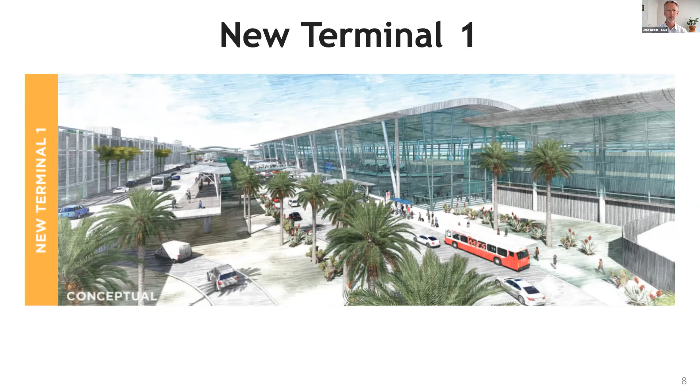So next slide. And go one more, please, Darby. The framework that helps guide our decisions internally, separate from those certifications I just mentioned, is a sustainability management program at the Airport Authority that comprises 7 unique plans: Clean Transportation Plan, Carbon Neutrality Plan, Climate Resilience Plan, Zero Waste Plan, Biodiversity Plan, a Water Stewardship Plan, and a Strategic Energy Plan. All of these plans are board accepted documents, and they really help drive the process of stakeholder engagement at the authority.

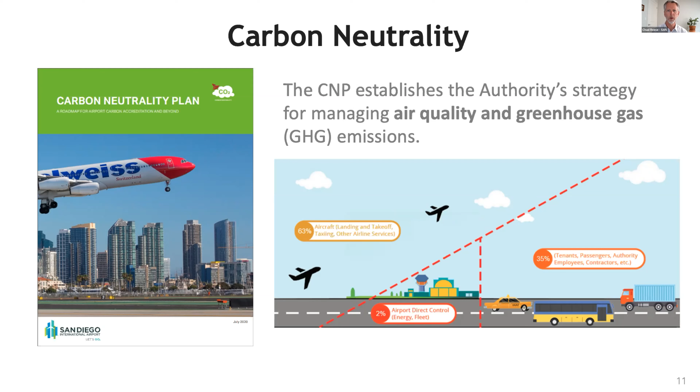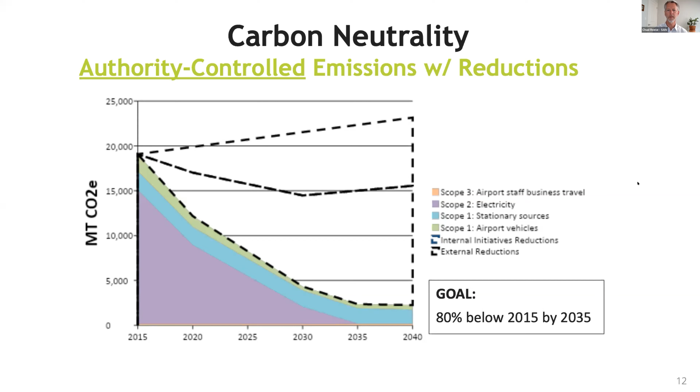But I'm going to dwell for a moment on authority controlled emissions on the next slide. And go one more, please. So what this demonstrates is a graph of carbon reductions through 2040, described by the different scopes: scope 1, 2, and scope 3. The dotted lines represent internal and external reductions. So we are able to leverage the state of California long-term goals, which gets us quite a bit of the way to our goals. But then we also work on emissions reductions for grid delivered electricity, so assets, buildings, and things like that. We do have a long-term goal of 80% below 2015 levels by 2035. Next slide, please.

So if you look at authority controlled emissions, we're really talking about on-site renewable electricity and batteries, grid delivered renewables that I mentioned, either Eco-Choice or the new San Diego Community Power, which the authority is scheduled to be opted into in the June timeline. High performance facilities really speaks to that slide I mentioned earlier with LEED and others. We focus on alternative fuel equipment, and we have a fleet of 100% alternative fuel vehicles at the airport.

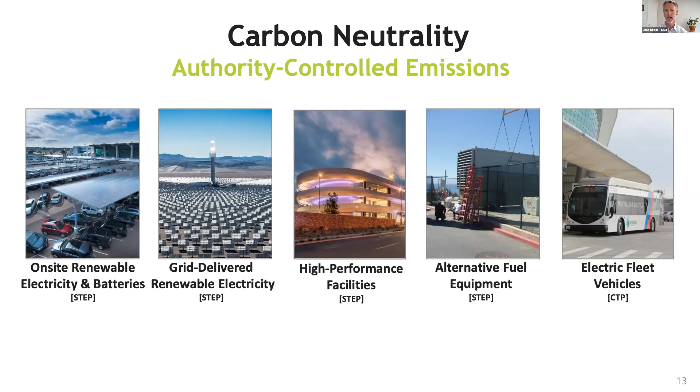The strategic energy plan really helps us guide conversations around electricity generation assets, batteries, storage, photovoltaic, solar, and also what we can do in terms of energy efficiency measures, ASHRAE audits, that type of thing.

What you can see in the chart below is within the next few years, we plan on adding quite a bit more photovoltaic, solar, and another battery storage system.

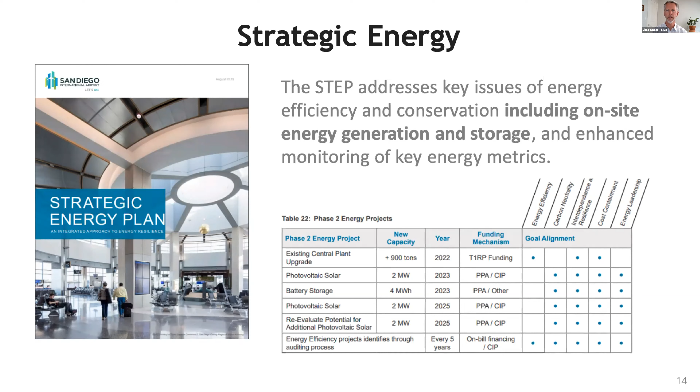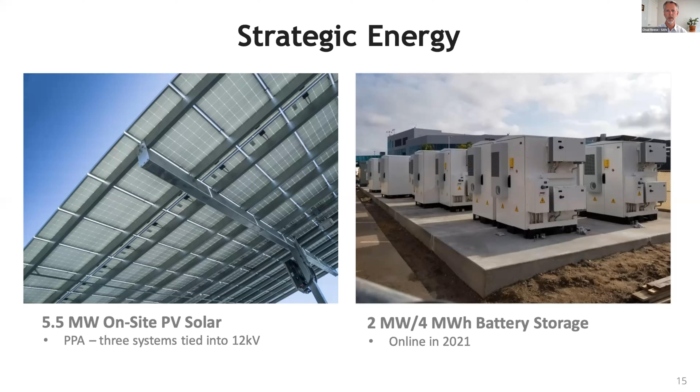Where we are currently is we have 5.5 megawatts of on-site PV solar. We're also in the process of commissioning a 2 megawatt, 4 megawatt hour battery storage system that'll be coming online in the next few months. These together provide resilience in terms of on-site PV, and the storage is really set up for us to shave the peaks and reduce our demand charges, et cetera.

And with that, Darby, I will end my presentation and hand the mic over.

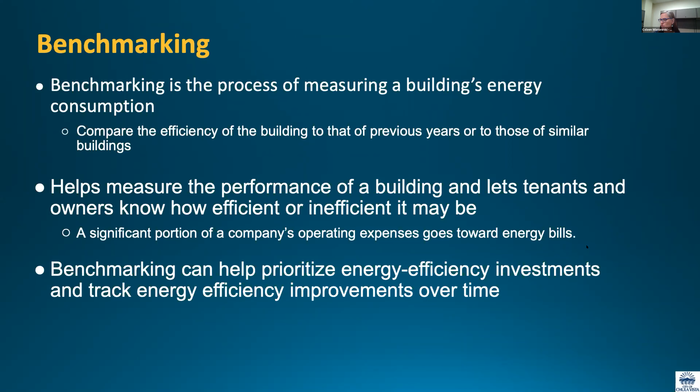We'll move to the next one. So, benchmarking basics: the most common tool for benchmarking energy usage is the US EPA's Energy Star Portfolio Manager platform, where building owners can register their buildings.

The first time setting up a building's account - oh look, we've got another poll going. Look at that, you guys are on it. I'm wondering, it's interesting to see as our results pop in, who's already benchmarking. We'll let that keep going as I speak here.

The first time setting up a building's account, there'll be some basic information about building square footage, maybe the number of employees or occupants, hours of operation, and type of building, like if it's retail or a grocery store. Building owners will also include a link to their SDG&E account information, so that information can be input directly from SDG&E.

So look, we're kind of at a mix there of folks that know if you're benchmarking or not.

That's very interesting. Once all the data has been entered in Portfolio Manager, it calculates an Energy Star score between 1 and 100, which allows for easy comparison of similar building types and sizes. For example, if a building gets a score of 15, it's performing better than just 15% of similar buildings, meaning 85% of buildings are performing better than that building. So there's a lot of opportunity for improvement. As part of this ordinance, building owners will still report through Portfolio Manager, and there's just a last step they click at the end to share that data with the city, so there's no double reporting needed.

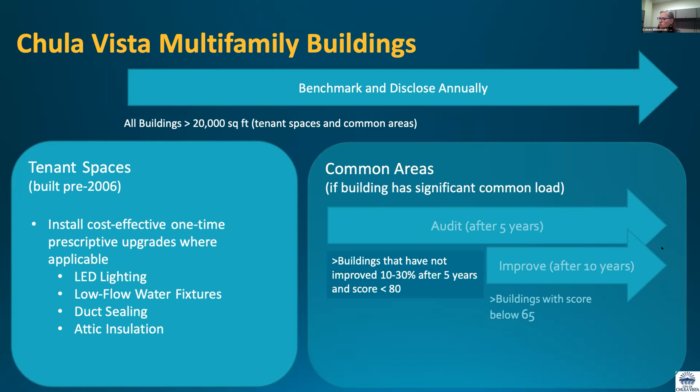So a lot of benefits of this ordinance for sure: reducing greenhouse gas emissions of existing commercial and multifamily buildings, helping lower the cost for building owners for operating those buildings, hopefully giving them more operating budget. One of the big things is improving our building stock in Chula Vista and really having that data to help us tailor programs for those building owners.

And then as we start rolling into our CCA, what Chad mentioned a moment ago with San Diego Community Power, this may help create future programs within that program to help really target our local buildings.

So next slide, just a final recap of our ordinance. We're really excited to have had council approval for this in March and really excited to start rolling this out. We've been in touch with other folks that have benchmarking ordinances, including folks at the City of San Diego, who have been very helpful in answering lots of our questions, and I'm sure we'll have many more questions as we roll through the next year or so.

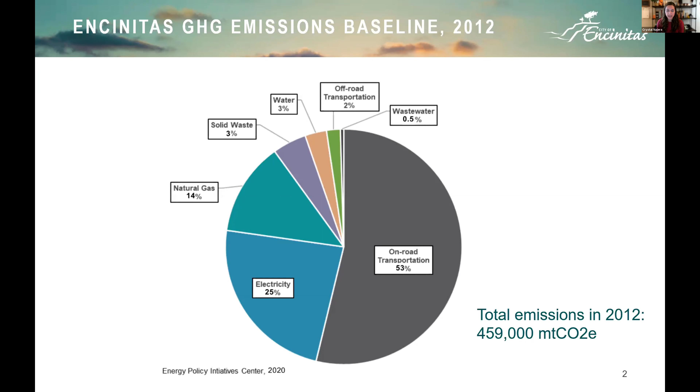So we're trying to reduce that, and what I'll focus on today are those three large sectors I mentioned. I'll start with electricity, because that's really where we've done the most in terms of reducing emissions related to the CAP measures built into our climate action plan.

We've got two measures related to electricity. One is to establish a community choice energy program. This may seem like not the right forum to discuss this when we're talking about building decarbonization, but what we're really trying to do with this new community choice energy program is reduce emissions through renewable energy that goes onto our grid — the grid that then feeds our buildings with a greater proportion of renewable electricity. That's why I included it here: we're decarbonizing before the electricity even gets to the buildings, which is really exciting.

The building occupants, in a way, don't even have to do anything, and they'll eventually be served with 100% renewable energy. The program is already beginning to launch — we're in phase 1, delivering electricity to municipal customers, and by this time next year, all customers will be online. For our city, Encinitas, we've adopted a requirement that when customers are opted in, they'll be opted into the top tier, which is 100% renewable energy. If they want, they can voluntarily opt down to the 50% tier or opt back to SDG&E. So we're really excited that we'll be decarbonizing our electricity source for customers very quickly here in our city.

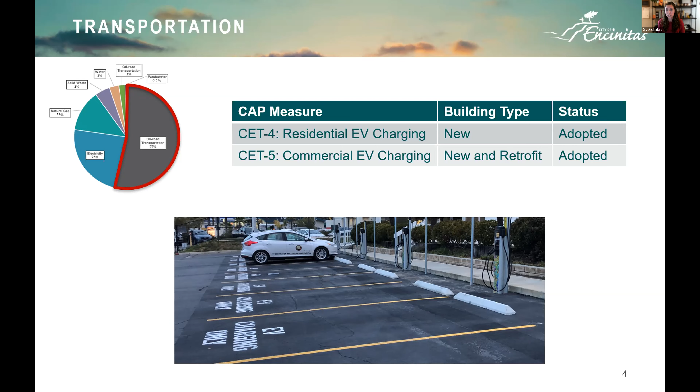So we've already adopted an ordinance addressing residential and commercial EV charging. We require EV charging for all new residential buildings, whether single family or multifamily. For commercial, it's again all new buildings, plus certain retrofit commercial buildings that come in for permits. We've got these requirements now on the books through our permit requests, and it's in our building code — that's another way we're looking at decarbonizing through buildings.

Then the natural gas piece of our pie, we're tackling in a couple of different ways. On the residential side, we've got two measures: one is looking at making our residential buildings more energy efficient, focusing on retrofitting existing buildings — when folks come in for a permit, certain types of buildings will be requested to become more energy efficient to get their permits. And with new buildings, we're looking at requiring certain buildings to become more electrified, depending on the different appliances.

Both of these measures are under development. The code requirements are under development, and we're looking to get those to council sometime this summer. This pie chart here shows where natural gas is being used in the residential setting. Most of it is either through space heating or water heating, so those are a couple of the appliance types we'll potentially be looking at electrifying through this ordinance.

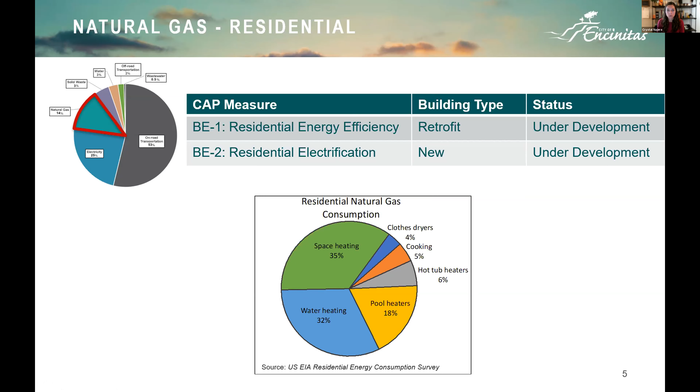Lastly, we'll go to the commercial component of natural gas. Here we're similarly looking at making commercial buildings more energy efficient, and also electrifying them through an ordinance. For energy efficiency, the ordinance would apply to all new commercial buildings and certain retrofits of a certain size. For electrification, we'd be looking at all new commercial buildings seeking permits in our city. This graph shows roughly where natural gas use is in commercial buildings - largely cooking is the highest use, then space heating and water heating after that.

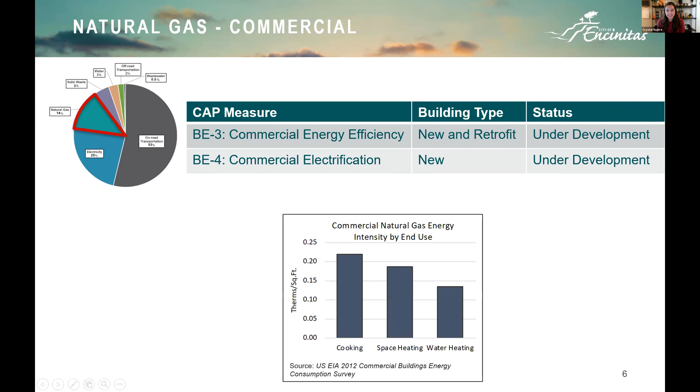So we're trying to tackle a lot with one large ordinance here, and this is our public process to get that ordinance eventually to City Council. We're kind of midway through this process. We've completed the public workshop at the beginning, and also just recently conducted a couple of stakeholder work group meetings - that was our comments gathering phase. We're taking those comments in right now and using them to develop an ordinance that combines all 5 of these different measures into one request to council to incorporate these requirements into our building code.

Once we have this drafted, we're going to take it to another public workshop and offer another public comment period. If there are comments that make sense to work into our draft language, we'll do so. Then we'll take the final ordinance to our Environmental Commission with a request that they recommend City Council adopt the requirements. We're hoping we can accomplish all this in the next few months and get something on the books by summertime to start getting more decarbonization happening in our Encinitas buildings.

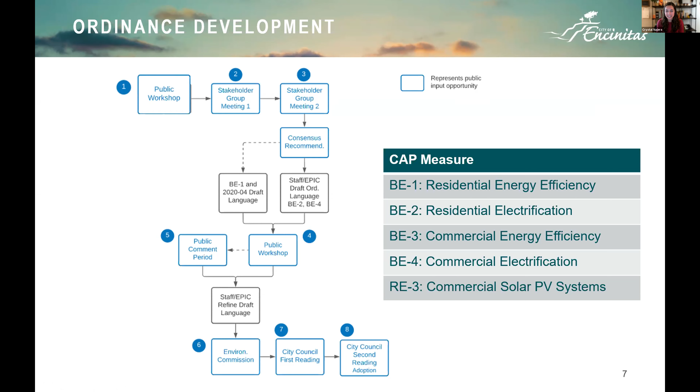I'll leave you with one last slide - I'm always happy to take emails if you're interested in further information, or you can go on our website and search /green building, and you'll find all the information related to this current effort we're working on. That wraps it up for me.

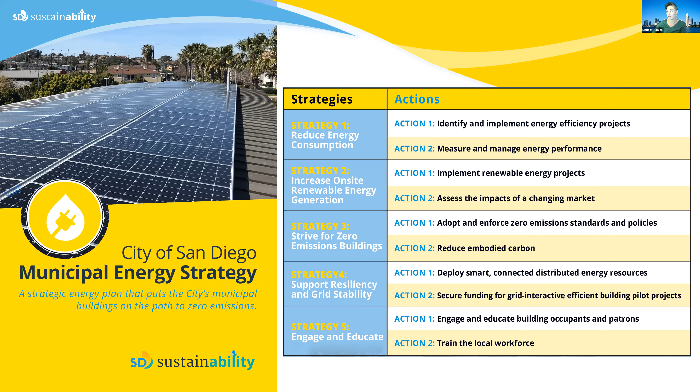So now that the strategy has been developed and published per the Climate Action Plan direction, we're working on development of the next step, which is our implementation plan. This is a much deeper dive with a lot more detail around specific energy project opportunities. So again, everything from efficiency to renewables to resiliency strategies like microgrids and battery storage.

And we're breaking those down by asset type so that we can provide that information to, for example, the library department to say, okay, across all of our 35 libraries at the city, here are the different opportunities that we've identified as ready to roll, and hope that we can work with the library department, for example, to implement some of those over the next 15 years.

Energy policies is another big focus in our implementation plan. As I mentioned before, the zero emissions municipal building policy is where we're focusing a lot of effort right now. We set this goal for ourselves to get to zero emissions, and so we want to reduce consumption.

We want to offset as much as we can with on-site renewables because we think that PPAs and other on-site installations can be cost-effective and perhaps help us save some costs, energy costs. But we also know that thanks to San Diego Community Power, whatever we can't offset on-site, we'll be able to procure from the grid and eventually with 100% renewables. So we're super excited to take advantage of that new resource.